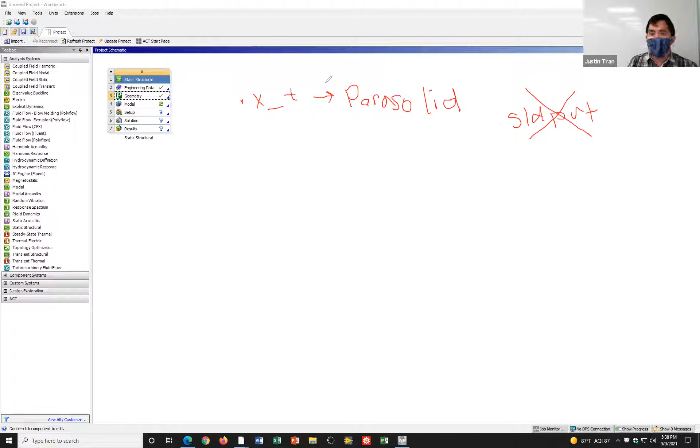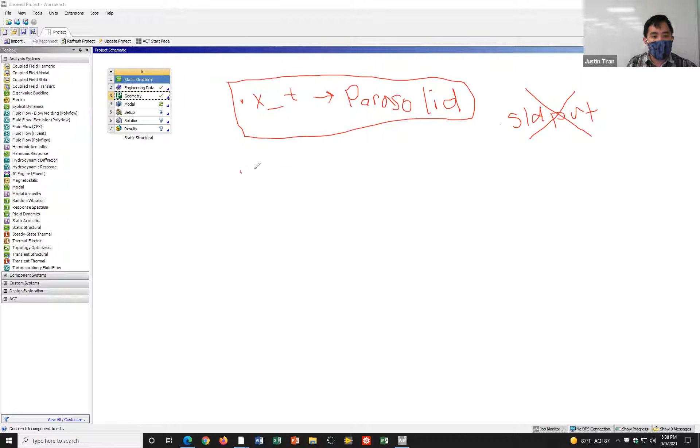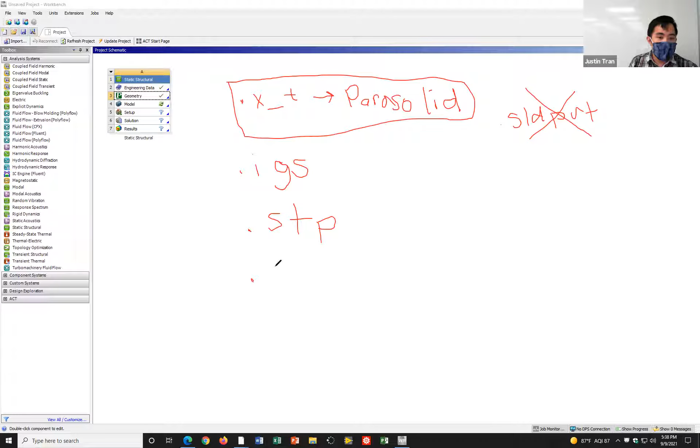You can do that within SolidWorks, you just have to explicitly do it. The x_t format, Parasolid, is a great file format and works really well, maintaining all the geometrical features. Some other ones that work really well that I use often are .igs files, which work really well for importing. STP also works really well, and that's the other file I have on the website, the .stp file. Then the sister or cousin file format for that is .step, and that one also works with Ansys.

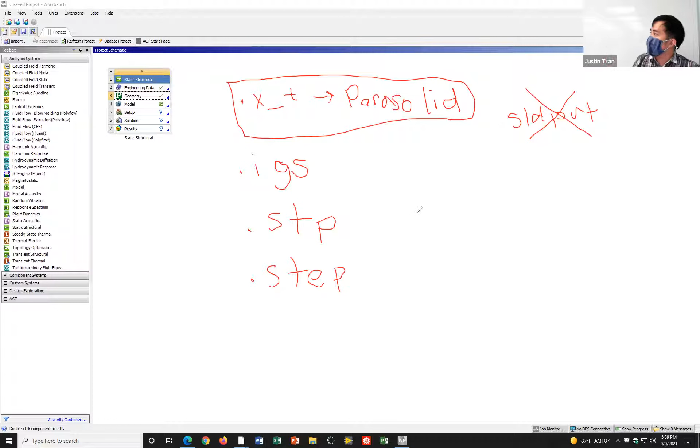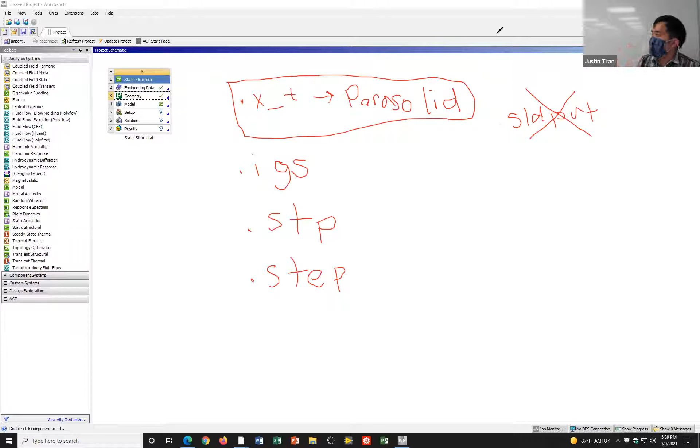All of these file formats are more open source, so both Ansys and SolidWorks can take advantage of them. All of these should work if you're moving a part or assembly from SolidWorks into Ansys. The only thing you have to do is, in SolidWorks, with your part or assembly open, click Save As and pick one of these file types. SolidWorks will convert your file into that type, and then you can upload that into Ansys. Just make sure you convert to one of these types before you import it, because if you try to import the SolidWorks part file directly, Ansys is going to say it doesn't know what this is, and you won't be able to do it.

Good question - is that Parasolid denoted with that P right there? Yes, that P right there is for Parasolid.

So that's imported the geometry, and the fact that you have a green check mark here means it's good to go. You can actually view the geometry - if you right click geometry and click edit in design modeler, you can view it. A lot of times it's good to view your geometry just to make sure everything imported okay, but for this one I've done this activity half a dozen times, so I know it's okay.

Is it just viewing, or do you edit? You can edit it too - you can actually view it and edit it within Ansys. Later on we're going to do an activity on optimization, and we'll use that feature right there, because when you set up optimization, you actually have to set up some stuff within the CAD software to do that, even if you imported it. But we'll cover that later on.

Before we actually launch Ansys Mechanical, the one thing we have to do is create our custom material property. The way we're going to do that is go onto this entry right here called engineering data. Once you double click that, it should bring up this screen right here.

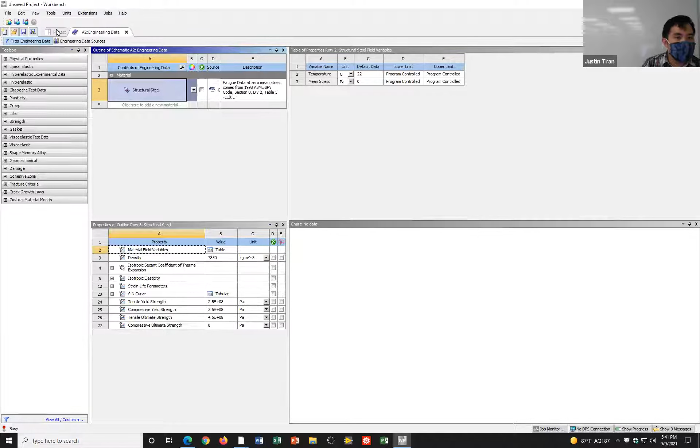Last time I had some people that didn't get the screen exactly like this. If you're not seeing a window exactly like this, you can go to View and click on Reset Workspace, and you should get everything that you see here. We're going to use at least these three on the left and the middle, but not the one on the right - make sure you have at least these three. Okay, everyone still with me? Everyone on Zoom - do you have this material engineering data window?

Okay, silence means yes. Okay, good.

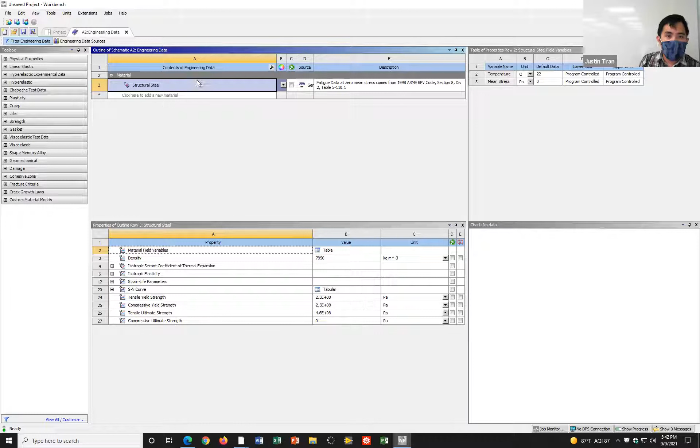Okay, and so you can see right here that the only material that we have loaded right now is called structural steel. This was the material that we used last time in our Ansys activity, and this was the only default that Ansys has. If you want to add a new material, you can either import it from SolidWorks, that's one thing you can do, or you can create the material custom here.

If you look at this entry right here, you can see that it says click here to add a new material. Okay, so let's go ahead and do that. The material that we're going to add is one of the alloys for aluminum. So let's go ahead and type aluminum. The specific one is going to be 6061 T6.

This name is flexible, because you're creating a custom one, you can kind of call it whatever you want. But usually it's better to name your materials after what they actually are instead of like Bob or Jim or things like that. So let's go ahead and hit enter. And then what you see here is that I've created this new material called aluminum 6061 T6.

But you can see here that there's this blue question mark right here. This blue question mark is basically telling us that we've named this new material, but we haven't actually given it any properties yet. In order to actually use it within Ansys, we have to assign things like the Young's modulus and the Poisson's ratio. So let's go ahead and do that.

All right. Now I want you guys to turn your attention to the toolbox on the left. What you'll see in this toolbox are all the different kinds of properties you can give your material. You can see there's a lot, right? You can give it linear elastic properties. You can also give it hyperelastic properties, and there's a lot of options there for hyperelastic.

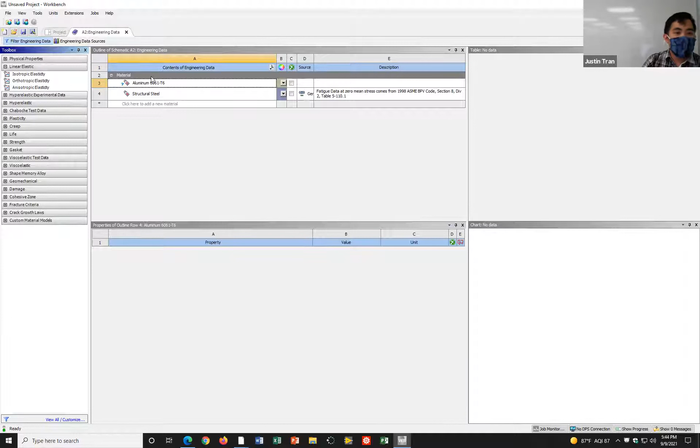So there's a lot that you can do because in Ansys you can do all different kinds of analysis, but at the very least, when you define a new property, you have to be able to define its Young's modulus and Poisson ratio. The way we're going to do that is we're going to assign it as an isotropic material. With aluminum 6061 T6 highlighted, go ahead and double click isotropic elasticity here on the left. Then you'll see the bottom of the screen update here.

Previously we didn't have anything here because we haven't assigned anything for this aluminum material property yet. But now we get a chance to actually assign stuff. If you click on this plus arrow next to isotropic elasticity, you'll see that there's a lot of properties that we can define. In particular, we need to define these two right here: the Young's modulus and also the Poisson's ratio.

And you'll see that the boxes are yellow right there. That's Ansys's way of telling you that, hey, you need to assign this before we can move on. So any questions on this so far?

Okay. Now we need to assign a value for the Young's modulus and the Poisson's ratio. So let's pop back into the PDF. If we look at the top of the document, you can see that our material, aluminum, will have a Young's modulus of 1 × 10⁷ psi and a Poisson's ratio of 0.33. So let's go ahead and assign those properties to our Ansys material. Let's come back to Workbench.

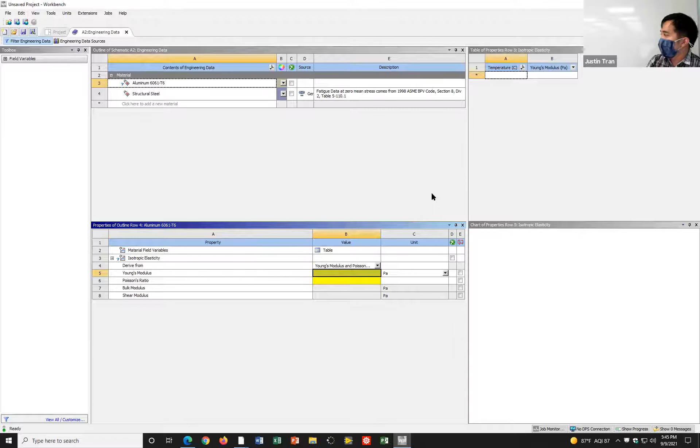Let's start with the Young's modulus. The Young's modulus was 1E7 psi, right? Oops, I don't know why it does that. But what you can see here is that the units for this Young's modulus right now are given in pascals, and so we need to change this.

So let's go ahead and click on this plus arrow down here, and then you can change the units for this Young's modulus to psi. Let's go ahead and do that because those are the units that we're given. With this unit as psi, we can change this to 1E7.

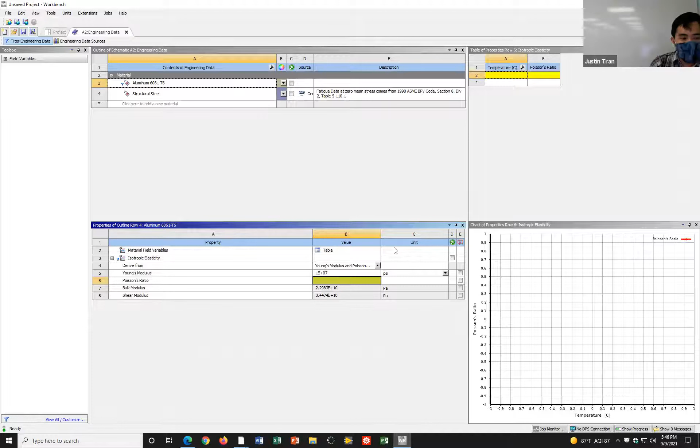Right? And that'll assign a Young's modulus of 1 times 10 to the 7th PSI. Okay. Right, and then let's do the same thing for the Poisson's ratio. And so if we check back on the document, we can see that our Poisson's ratio is 0.33. Okay, and so for the Poisson's ratio, we're just going to manually input 0.33 like that. Okay, and then we're good to go.

And so after we've assigned the Young's modulus and Poisson's ratio, you'll notice that this blue question mark next to the aluminum is gone now, right? And so now that that blue question mark is gone, now we can confidently say that this is a real material. It's like a real boy, right? And so now this material is actually ready to go. We can actually use this in analysis, okay?

So any questions on any of this? Everyone's still keeping up okay? Okay. Yeah, question? Oh, okay.

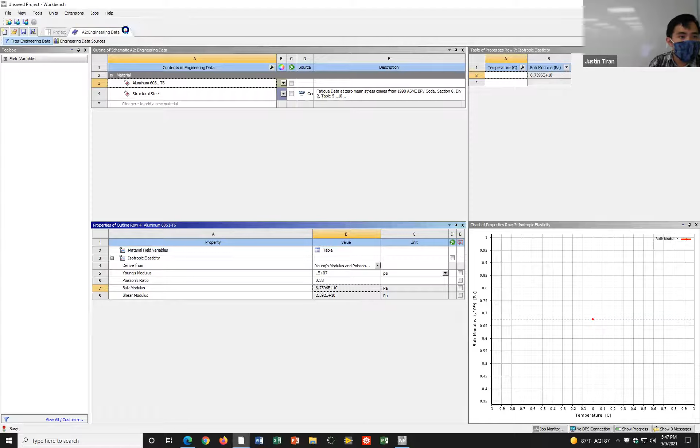Okay, and so now that we're done with this, let's go ahead and close this out. And so if you go to this tab up here on A2 Engineering Data, we can go ahead and close that tab, okay? And then now we're ready to launch Mechanical. And so on row 4 right here with model, let's go ahead and double click that. And if you get a security alert, you can just hit cancel. Okay.

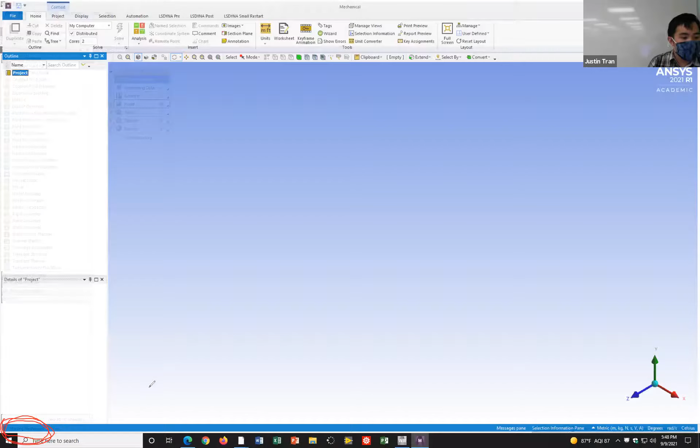Okay. And so it's starting up Mechanical. And so if you're wondering what Ansys is doing, you can check the lower left corner. Okay. All right, if you're opening up Ansys either for the first time or you're here in the lab, you might get this annoying ad. And so if you get that, you can just click on geometry here on the left, and then you can see your part. Okay.

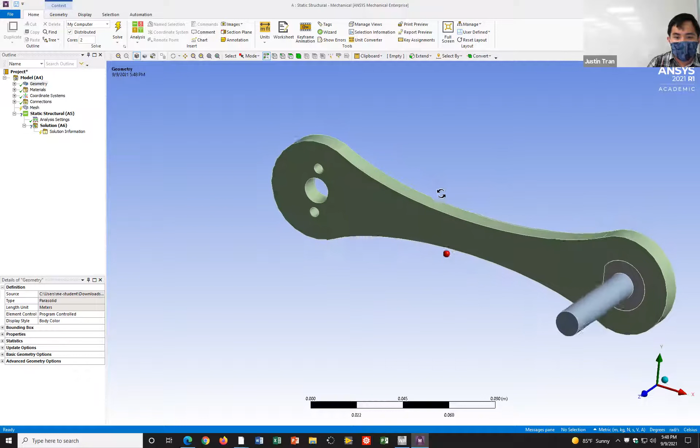All right. And so here we have our bike crank. And so this confirms that our geometry uploaded just fine. Okay. And we're ready to go. Okay. And so before I let you go, because I kind of want to let you guys handle Ansys mostly on your own today, I do want to show you how to suppress parts, okay?

And so part suppression is something that you can do, and I always spell this wrong, suppress. Okay. And so part suppression is something you can do if you want to focus your analysis on just one part of the geometry, okay? And so in our case, the part of the geometry that we're interested in is actually just the crank, okay? But our CAD file here actually came with some extra stuff, right?

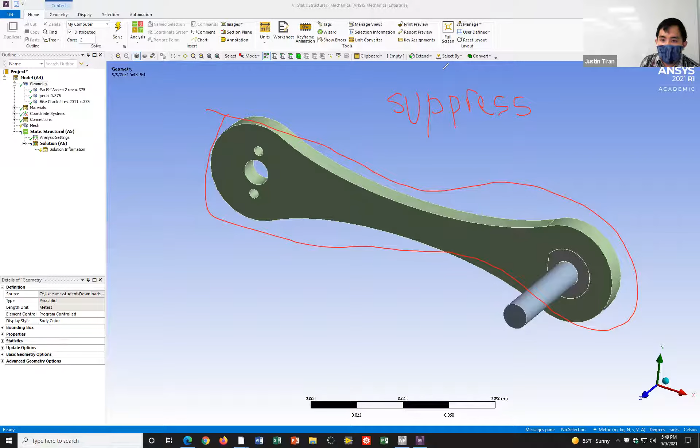And so here we have this rod right here is the pedal. And then we also have this kind of fitting, I don't know if you can kind of see it, that fits the pedal into the crank, okay? And so we don't really care about the pedal or the fitting in here. And so we're gonna suppress it, okay?

All right. And so if you go over to geometry on the left, and if you hit the plus arrow, which expands the list, you can see all the different parts that we have here, okay? And if you click on the different parts, they're going to highlight in the 3D window for you, okay? All right, but in our case, we don't need the pedal. And so what we're going to do is we're going to suppress it.

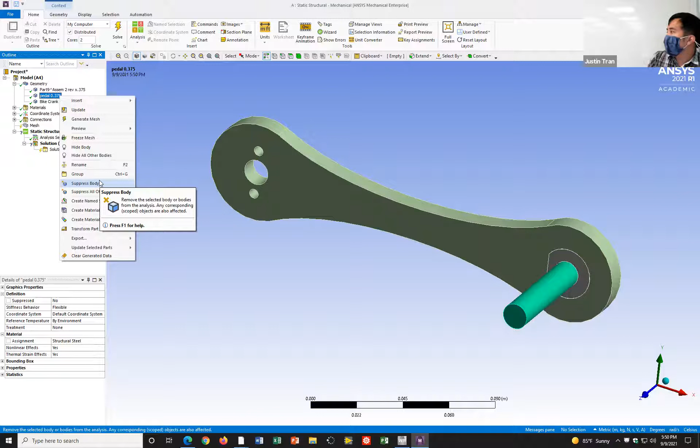And so to suppress a part, you're going to right click the part. And then after right clicking it, you're going to go down to this option right here called suppress body, okay? And so if you read the tooltip for this, it says that it removes the selected body from the analysis. And so we're basically going to say, we don't need you for this, okay? So let's go ahead and click suppress body, okay?

And so that got rid of the pedal. And then we also need to get rid of this fitting right here, okay? So let's go ahead and right click on that and click suppress, okay? And then after that, you should be left with just the crank.

All right. Any questions on this so far? Was everyone able to suppress everything? Good. All right.

Okay, oh, actually, one more thing. Even though we've defined our material property, we haven't yet assigned it to our part. So with this bike crank highlighted, make sure you left click on this. If you come to the bottom left of the screen, the details menu, you should see that this is where we can actually assign the material.

Right now it's assigned to structural steel because that's the default. You can go ahead and change this to aluminum 6061 T6. All right. So now the bike crank is made of aluminum, and you're good to go. From here, you can start on page 5 of the PDF. On page 5 you should see instructions on meshing, boundary conditions, loads and constraints, and the analysis.

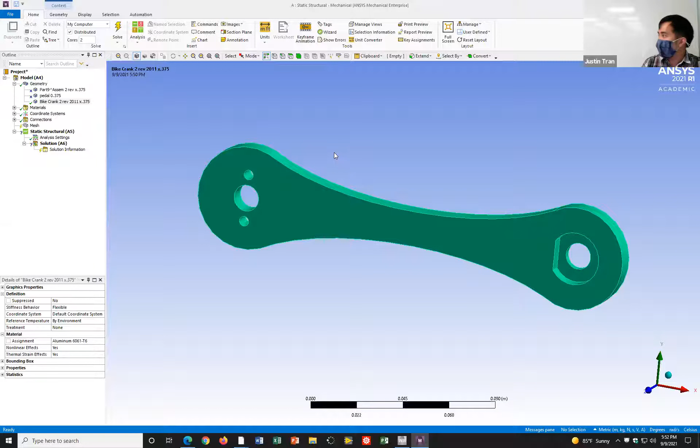From here, I'm mostly going to let you guys handle this on your own. But I will be going around the classroom, and coming back to Zoom to help people individually. The only thing I'm going to tell you is that for the mesh, I want you to include at least one method object, okay?

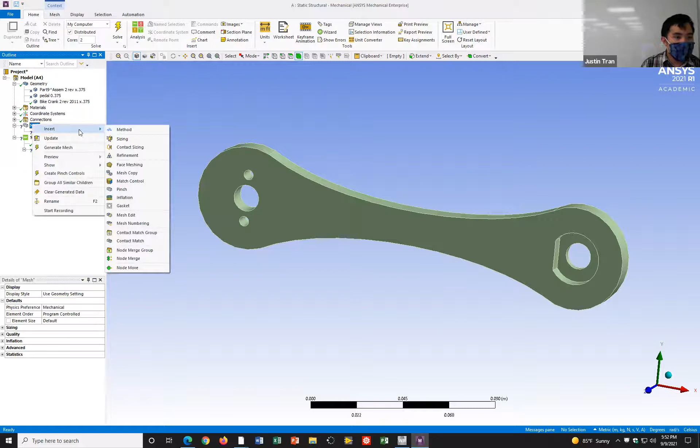That's it. This is what it says in the PDF too. I want you to assign a method to this, and I also want you to assign a sizing. This is what you're going to use to change the size of the mesh. In terms of loads and constraints, you need at least one fixed support. Based on this physical situation, I'll let you choose where the best place for the fixed support is going to be.

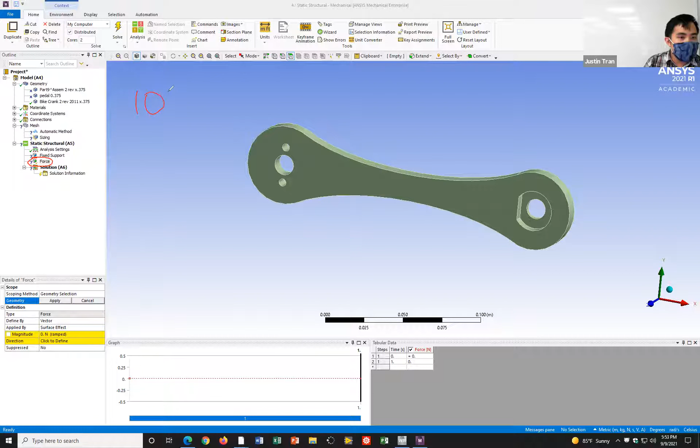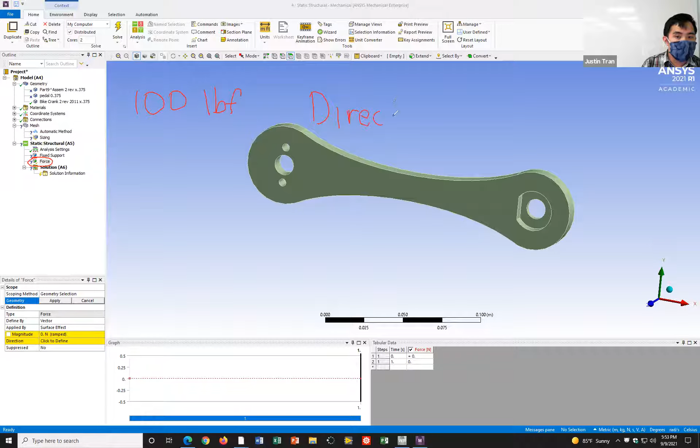I also want you to include a force. In the PDF, the amount of force I want you to apply is 100 pounds, so it's a 100-pound force. But I want you to decide which direction for the force makes the most sense. Think about which direction is going to cause the greatest amount of stress within the bike.

Because ultimately the point of this finite element analysis is to determine if this bike crank is going to fail under these loadings. In those situations, you want to simulate the worst possible loading situation so you can see if your structure is going to survive that worst case.

You can apply the force in this direction, this direction, or this direction, and you can even do it into and out of the page. Think about what's most realistic for a bike crank, for someone pushing down on it with their foot. Among those realistic conditions, which one is going to cause the most stress?

For your results, the only ones you really need are total deformation and equivalent stress. This is the starting point. Throughout today's activity, I want you to fill in all the settings for the automatic method, the sizing, the fixed support, and the force. If you do all those correctly, you should be able to get the results.

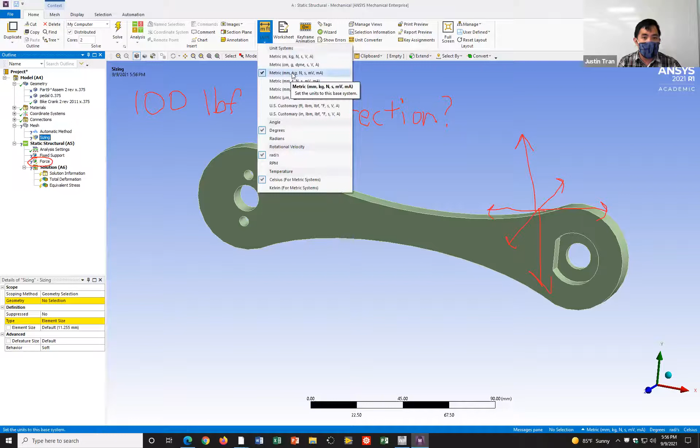But then when they got to the force, then obviously they need something in pound force. And so they switched it down here. And so the nice thing is that whenever you switch units within Ansys, it'll automatically convert everything before that. And so you can kind of switch around the units based on what's convenient for you at the time. I think the worry that people were having is that if they switch units here, is that going to mess up stuff over here? But it's not. Whenever you switch units, it's going to automatically convert stuff.

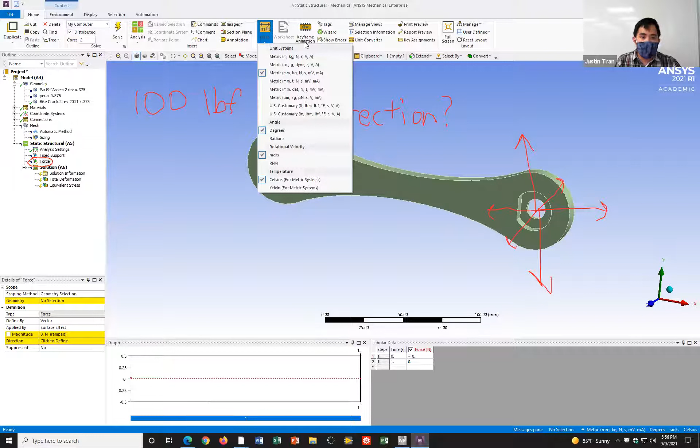Feel free to work together too. So you don't have to work in silence.

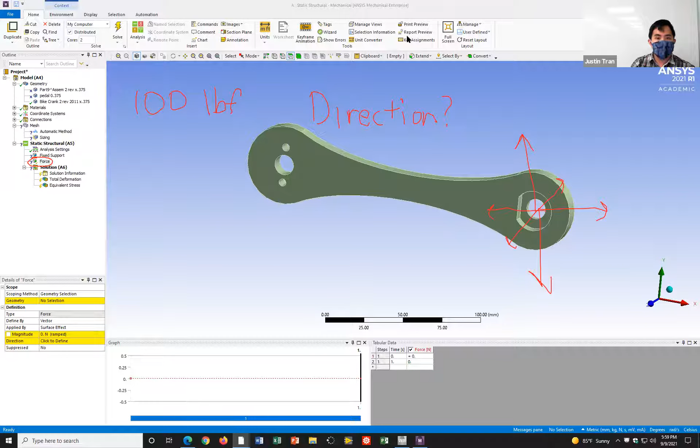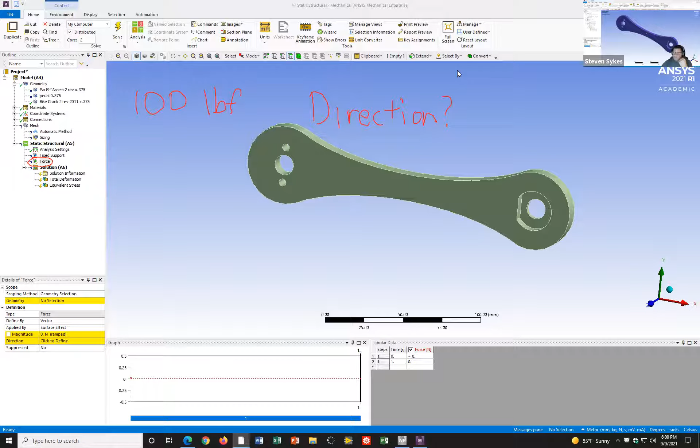Dr. Tran, when we're selecting the mesh using the method that we added, it says to select hexahedrons, but the element order that I'm selecting does not give me hexahedron. Yep. So the hexahedrons is going to be from this method right here. Right now it's grayed out because you need to select a body. So if you select this entire body like that, you hit apply. I see. And then now you can change it. Gotcha. Oh, I see. So it does only say tetrahedron.

When you mean quadratic order, are you referring to all quad for the mesh type? No, so the quadratic order is this one right here, the element order. Oh, okay. Yeah, and right now this is the global setting, and so I want you to change this to quadratic. Right here. Then just leave the mesh type to be quad and tri. That one's fine. Oh, I get it. You select the quadratic, then the hex dominant shows up, allowing you to select that one. Yes. Okay. Cool.

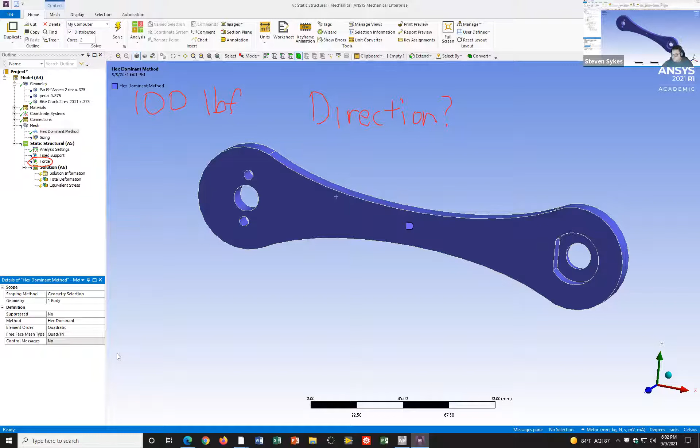This error message is saying that geometry selection is required. So right now your boundary conditions aren't set yet, and so you need to set the boundary. Oh, I thought I could just run the mesh just to see if it works with the hex. If you wanted to check the mesh, you can right click the mesh. Right there is fine. So just generate. There we go.

Cool. So that seems like it likes the tetrahedron, or the hexa. Yeah, that was good. So the hexahedron refers to kind of the shape of these blocks. You can see what it looks like. So that's what a hexahedron is. Cool. Excellent. Thank you very much.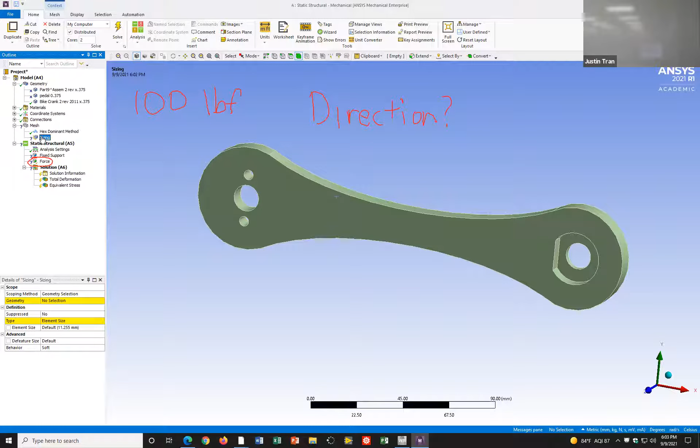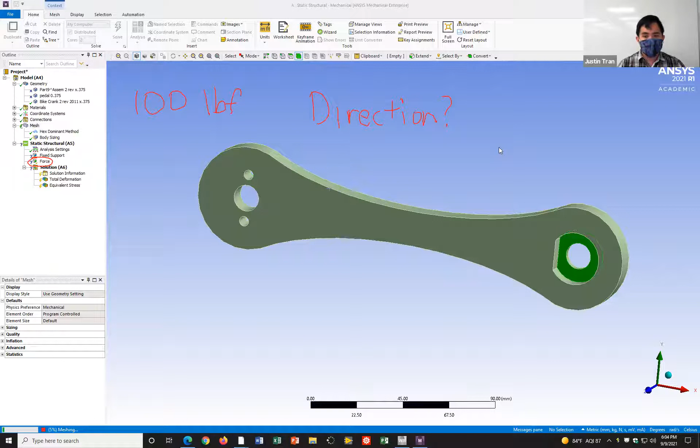I'm trying to. What was the error that you got, David? Accidentally clicked out of the error page. Oh wait, it just says the mesh failed to generate. Try making your elements a bit smaller.

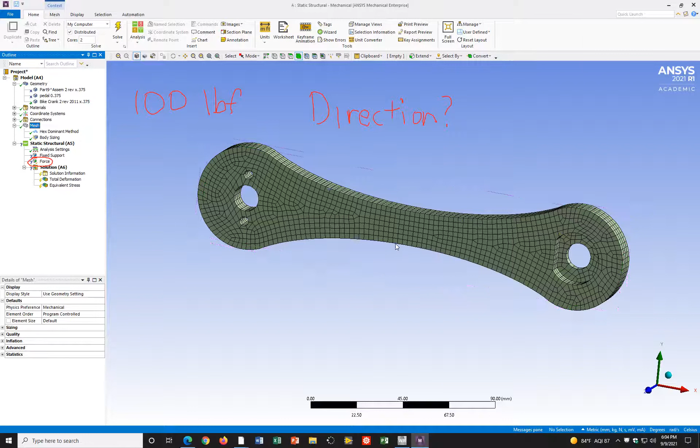So the thing with hexahedron meshes is that they're a little bit hard; it doesn't always work for every geometry. And so kind of the solution for that is just to make the elements a little bit smaller. So go to your sizing object and try to make it a little bit smaller than it was before. All right, I'll try it out.

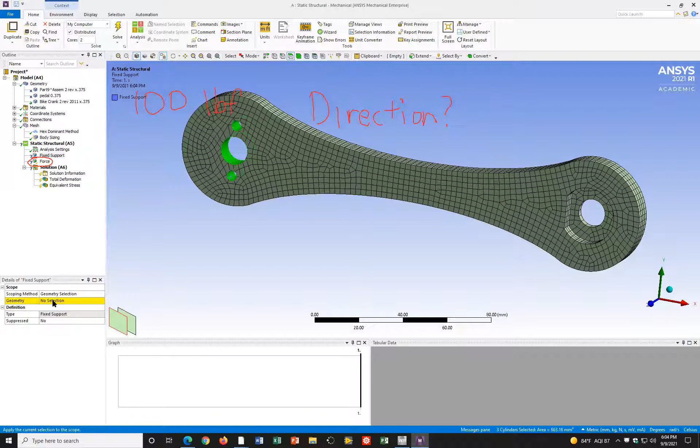Question. For the refinement, since we're working with 3D, would we be choosing like the inner part of the shape? Yeah, it's a good question. So in refinement, when we did that for the 2D case, we chose an edge basically. For 3D, you can actually do both. You can do an edge, or you can choose a surface. Surface will be a little bit more stable because then it has a bigger surface area for it to refine around. But you can do an edge too, and it should work.

And if we were to do the edge, we would have to choose both sides? You can choose multiple surfaces too. If you hold control on your keyboard, you can click multiple things. But technically you don't have to, so you can just refine around one edge, and that's technically okay. But if you want to select multiple ones, you can hold control and then click multiple surfaces.

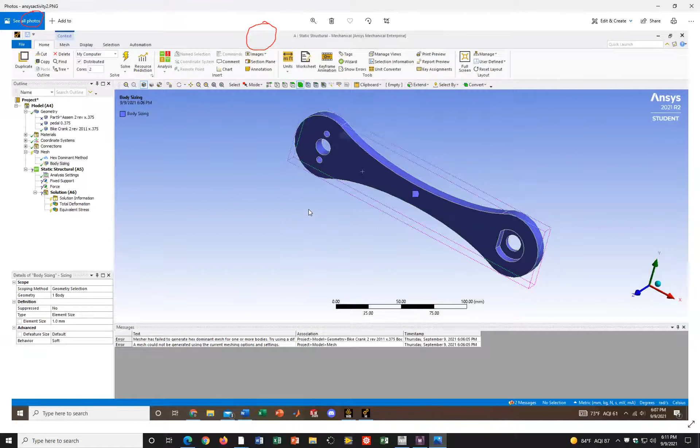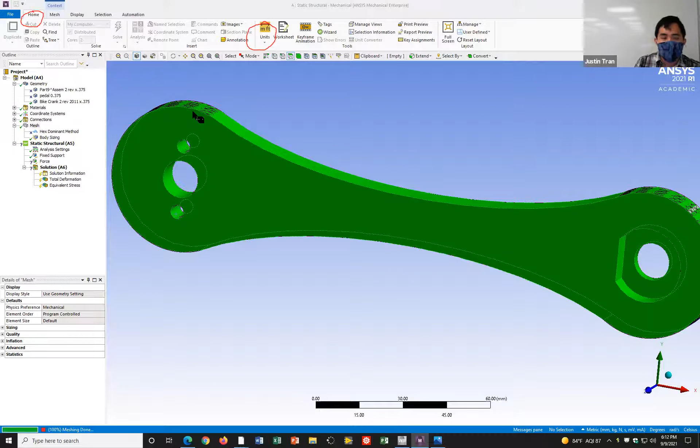David, can you try just suppressing this one for now? If you go to your hex dominant mesh, just click suppress, and then see if you can create the mesh like that. If I remember from last year, a couple people had some issues with the hex dominant mesh too, and no matter what they did, it wouldn't work. So it might be a computer specific thing. Yeah.

I think I may have the same problem. It's not generating the hex. Well, at first... go ahead. Yeah, go back to your sizing. Right now your sizing is 5 millimeters, so you're saying each element is 5 millimeters big, and you want to make that smaller. So go ahead and change it to 4 millimeters. Try lowering it. You have to uncheck it. You see the little view there. Now you can.

Same issue with the hex. Originally I did the refinement, then generated the image, and it just became that. The refinement update is still staying the same. You might have to just regenerate the mesh, so right click on the mesh.

Unfortunately the refinement only works with tetrahedrons, it doesn't work with the hexes. For this activity it doesn't matter all too much, you're going to get probably the same thing, but it's good to know.

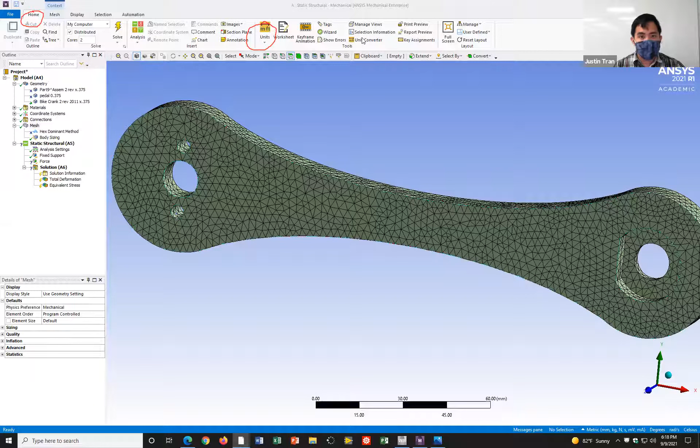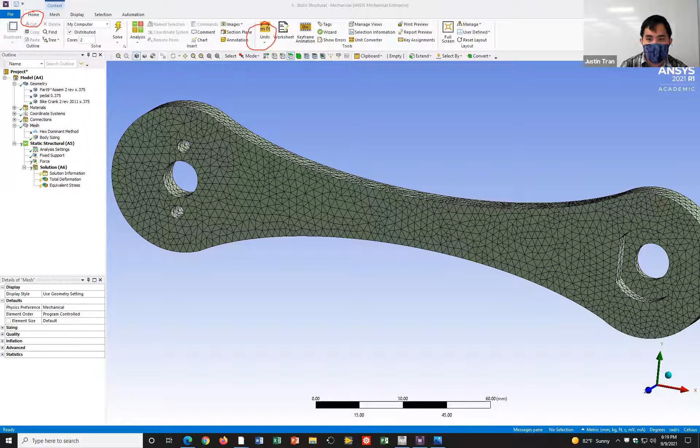Let me just message you. Okay, yeah, try making it smaller, but you can also try suppressing that one too.

All right Jasmine, you had a question right? Yeah, actually I had a question.

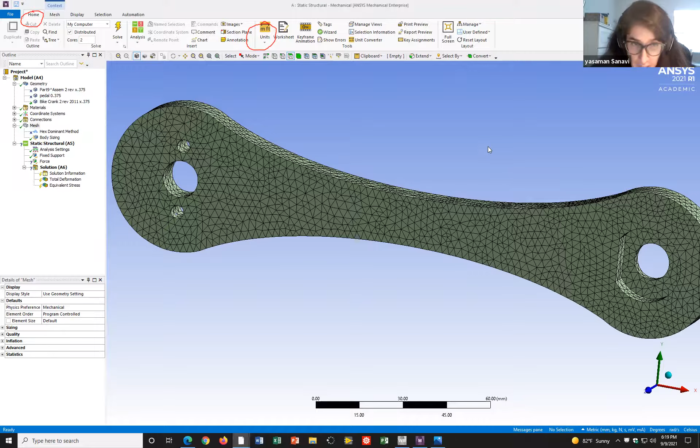I was wondering, in Ansys is there any way we can measure the thickness of the bike crank? Because I accidentally put 0.2 inch for the mesh size, and I think I'm getting exactly 2 cubes on the thickness of the bike crank, so I thought maybe the thickness is 0.4, but I don't know if there's any tool to measure it. No, that's a good question.

It's definitely useful because a lot of times you want to choose the mesh to be kind of the same as your thickness.

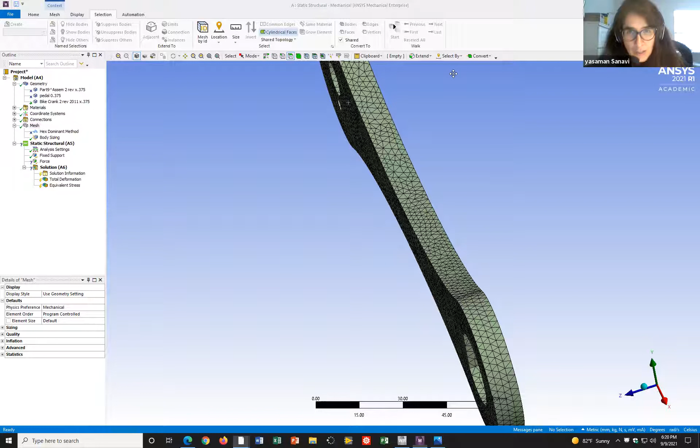I know in Design Modeler there's a way that you can measure stuff, but I don't know where it is. I opened Design Modeler just to check. I guess it might be possible, but I'm not sure exactly where. Oh, actually, if you open the part within the other CAD software, which is SpaceClaim, there's a measuring tool in there that's pretty intuitive to use. I know that one because we're going to use it for a future activity, but for Design Modeler, I'm not sure where the measuring tool is exactly.

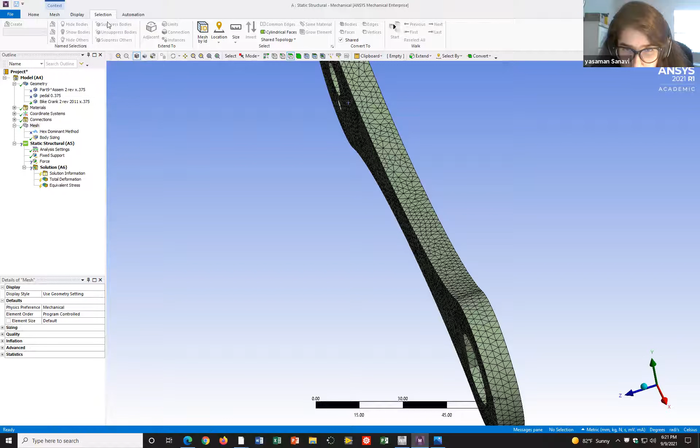It's actually deactivated SpaceClaim for me, I don't know why, it just won't click on it. You might have to close Design Modeler in order to use it. Oh I see, okay, yeah, because I don't think you can have both open — in theory if you use one to modify the geometry it's going to affect the other, so it probably just prevents you from opening both. Yes, that actually makes sense, thank you.

All right, how's everyone doing? Was everyone able to get to some simulation results, see the information? Cool, cool.

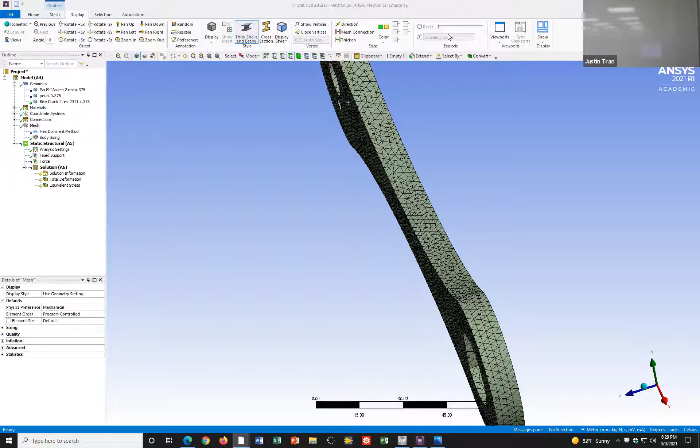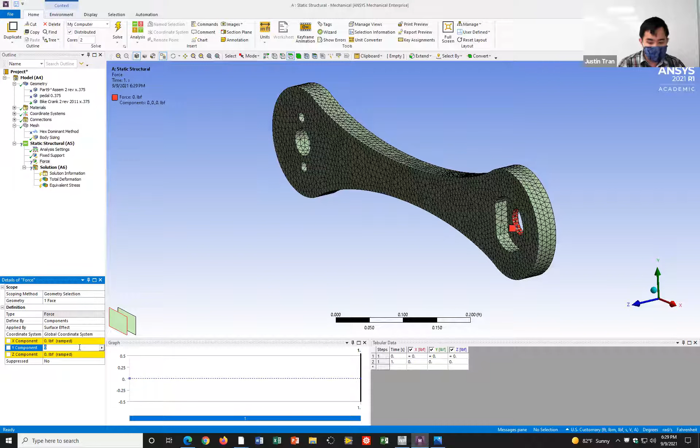Okay, so I do want to bring it back for just a second. No matter where you guys are in the activity, let me go ahead and summarize where I want you to take this, okay? Actually, let me finish this up myself so you guys can see. Select this one here. Force. So let me go ahead and run this. Okay.

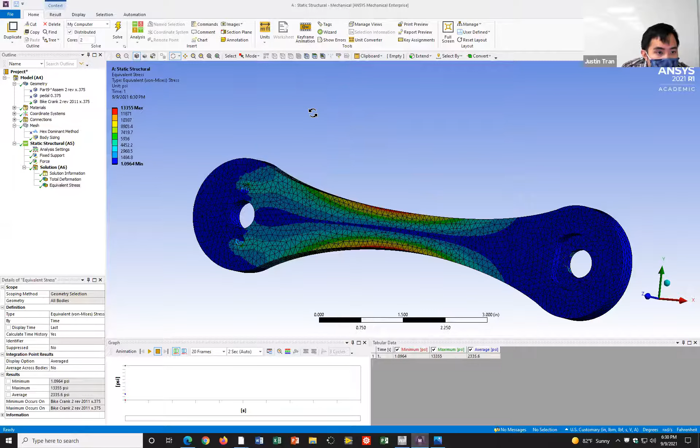And so when you run the simulation, you should get something like this for the stress field. And actually, let me change this to PSI. Okay. And so you should get an equivalent stress field where you get a stress concentration over here, okay? And so this is kind of what you should expect.

And so the question is, what do I want you to do with these results? If you go back to the PDF and you go down to problem 5, you'll see that I'm asking you to find the maximum load that this bike crank can handle. Because right now we're applying a load of 100 pounds this way, and that's producing a stress field that has a maximum equivalent stress of about 13,355. A question in the chat?

I'm using tetrahedrons for now. If you have it in hexes, that's great. But for this one, tets should be okay. The only thing is you need to make sure that you have quadratic elements. That's the most important thing.

Okay. And so if we go back to the PDF, what I tell you here is that the aluminum that you're using to make this bike crank has a yield strength of 35,000 psi. If you remember from a couple lectures ago, the yield strength basically means that if the equivalent stress ever exceeds the yield strength, then that bike crank is gonna break. And so what I want you to do is increase the load until you get a maximum stress of 35,000.

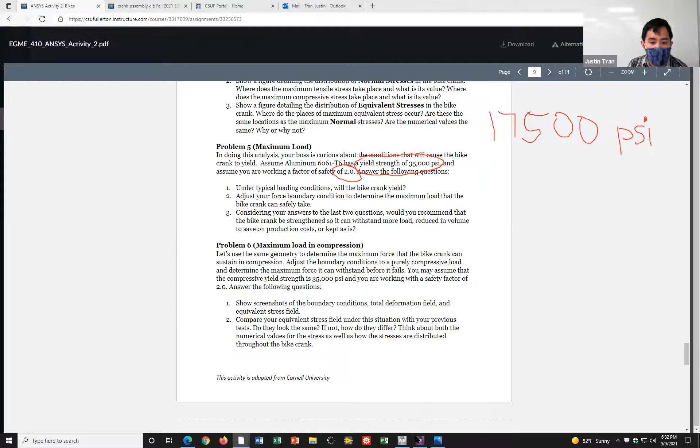And so if we go back to Mechanical, and I go to this force, right now you can see that the force I'm applying is 100 pounds. If I increase this to, let's say, 120 pounds, I rerun the simulation. I increased the force to 120 from 100. You can see now that the maximum stress has increased. Before it was about 13,300, now it's about 16,000. So we're creeping a little bit closer to 17,000.

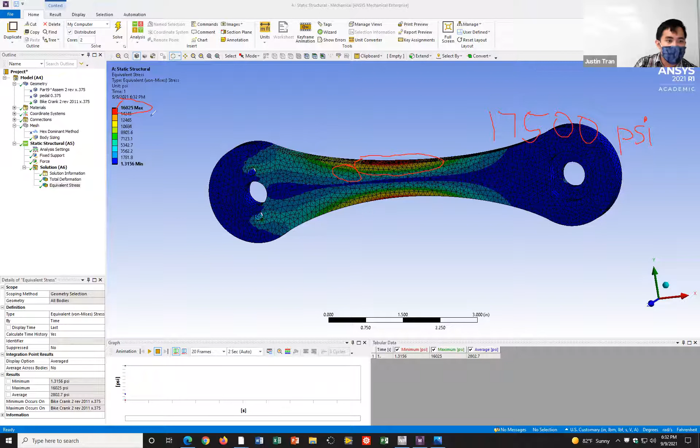To get even closer, I can increase the force even more. Actually, no, I won't, because I know what the answer is, and I don't want to get too close to the answer. But basically, once you have everything set up, you can keep modifying this force until you get a maximum equivalent stress of 17,500. And once you find that force that produces this stress, that's going to be the answer to that problem.

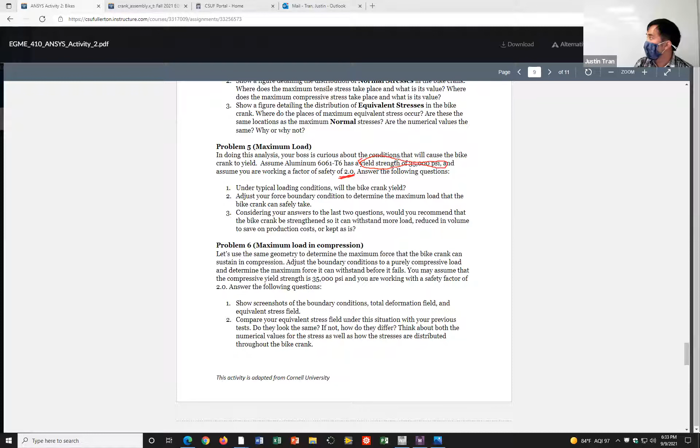How do we come up with the number 17,500? Yeah, so the 17,500 comes from the fact that for the aluminum material you're using, the yield strength is 35,000. Once the stress reaches 35,000, the aluminum bike crank is going to fail. But I want you to work with a safety factor of 2, so we're cutting that stress in half, so that we have a little bit of margin to play with. Does that make sense to everyone? Any questions on that?

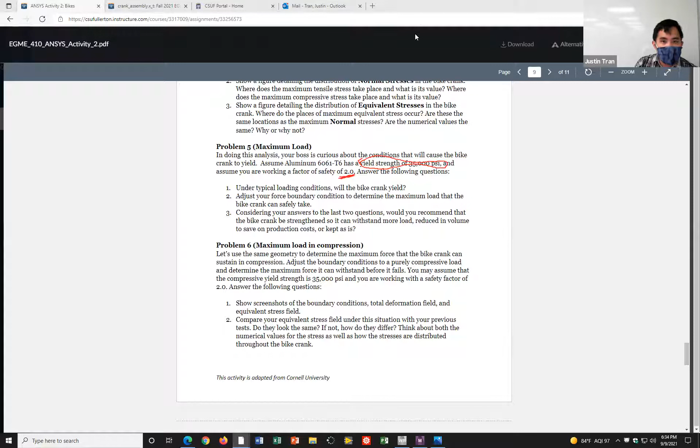Okay. All right, and so that's problem 5. For problem 5, you're applying the force here in the y direction. But in problem 6, I want you to find the maximum load that it can sustain in compression. So I want you to change the direction of this force. Instead of the negative y direction, we apply it in the negative x direction. If I change this x component to negative 100, now the force is compressing the bike crank this way.

And so if I run the simulation with the compressive force, you can see that the stress is much lower here, because we're no longer in bending. In fact, the stress we're getting is around 1230. So looking at that, you can actually increase this force quite a bit. Let me increase this to 1,000. This one I don't know the answer to yet, because I haven't done this part, but I do know that in compression it can sustain a lot higher forces than in bending.

Okay, right, and so you can see I've increased the force from 100 to 1,000. And you can see now that the maximum stress is much higher, and so we're a lot closer here. So let me do one more. And so let's try 1,500. Okay.

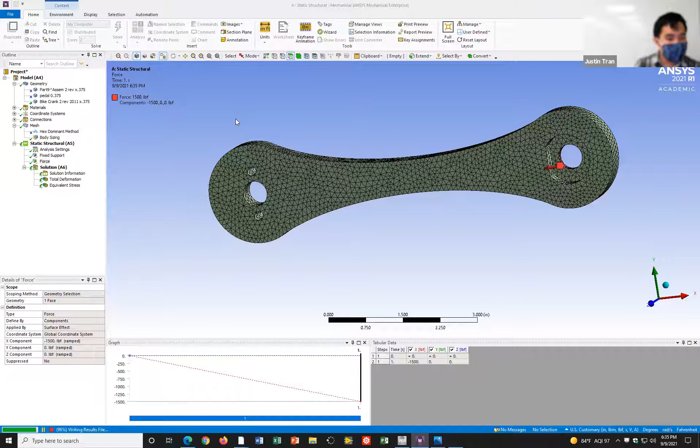Okay. All right, and so with the force of 1,500, then we went over a little bit, okay? And so the maximum force that it can sustain in compression is somewhere between 1,000 and 1,500, okay? And so I'll let you guys kind of play with that and try to find the exact number. Okay? And so that's problem 6, okay?

And so there's a second problem 6 because I'm bad at numbering and I'm kind of an idiot. But in this problem here, what I want you to do is I want you to take the results of what you found in problem 5 and problem 6, and I want you to put it in a way that you would basically communicate with your manager for it.

Okay. Because a lot of times, when you're working as a finite element engineer, your manager or even your coworkers are not going to want to look at pretty screenshots of your work. And so what they want is basically just the main points of your analysis. Okay. And so in problem 6, basically what I want to do is, imagine you're writing an email, you're writing a report to your advisor or to your manager to basically tell them what you found from your finite element analysis.

Okay. And so, the point of this is to get you guys in the habit of, how do I express my finite element results in writing, to give you a little bit of practice, because we do have 2 projects in this class. So we have a midterm project and a final project. And so this is your chance to get a little bit of practice of, how do I take these finite element results, which are normally figures, and then communicate them in a way that's parsable to someone who may not be an expert in finite elements.

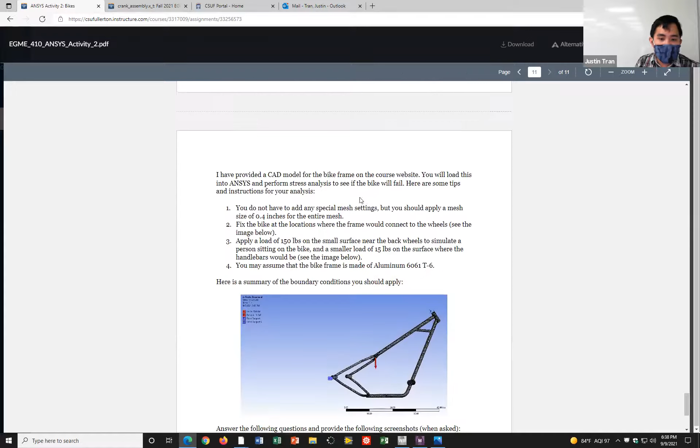Okay. All right. And then problem 7. And so the very last one, I want you to do a separate finite element analysis on this bike frame. Okay. But I thought about it before the lecture today, and I'm making all my grad students do this because they're a little bit more advanced. But for you guys, since this is the undergraduate version of finite elements, and I'm already asking you guys to do a lot already, I will make the very last one optional.

Okay. And so if you do it, I'll give you a little bit of extra credit for it. I'll give you a 10% bonus on the points for this one if you want to do that one. But you don't need it to get full credit. Okay. And so I'll send an email to confirm that, because I know that there's a lot already, and I want you guys to make sure that you get everything else done first before you tackle something like that. Okay. But if you do want to do it, then there's instructions for you here in order to do this analysis on this bike. Okay.

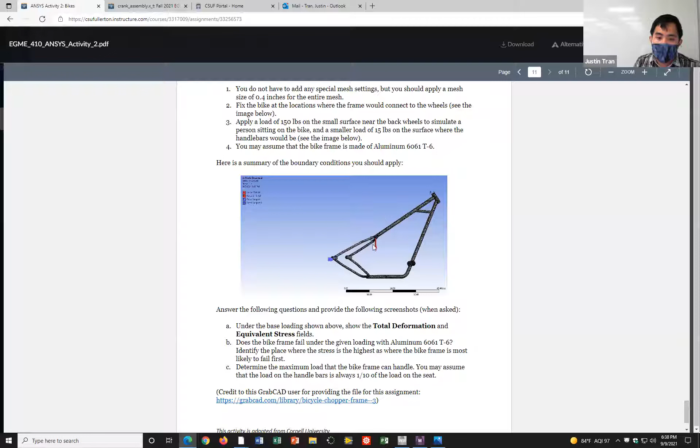All right. So any questions on any of this? Okay. All right, so that's all I had planned for today. And so I know we still have a little bit of time left. And so, if you guys still want to keep working on it, I'll stick around for the next 20, 30 minutes just to help people out. But if you want to work on the rest of it on your own time, that's fine too.

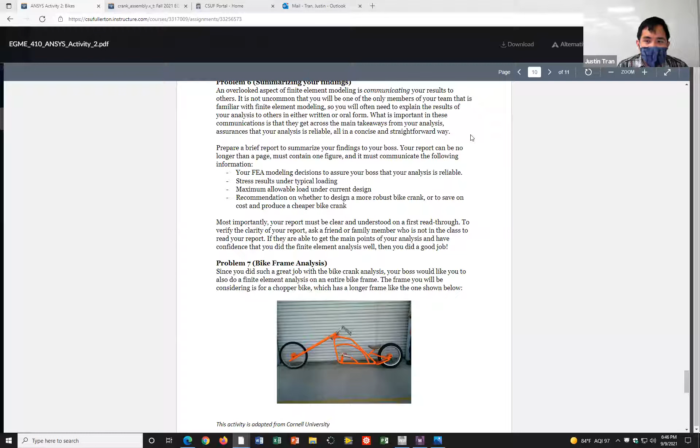There's no right or wrong answer for the positioning of meshes in static structural? What do you mean by positioning of meshes? Like selecting the refinement. Well, for the meshing, I selected this on my screen. Oh, let me look at your screen.

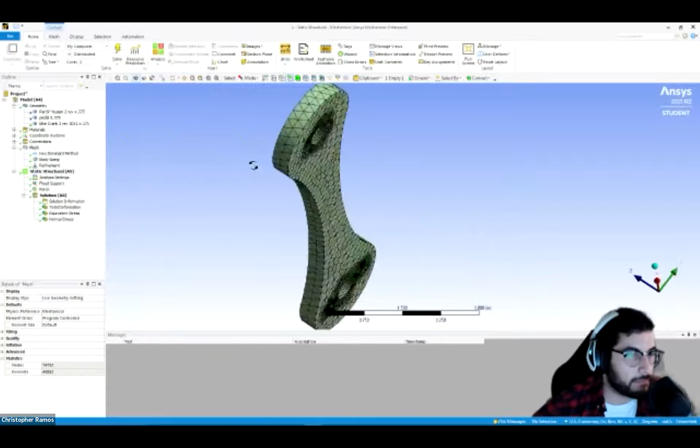Yeah, I selected this for my mesh, the front and back. And I just wanted to see if there's really no right or wrong answer for selecting the type of mesh. It's just based on my own analysis.

Yeah. So generally, where you want to add refinement is, and I've been telling people in the class this, that when you add refinement, you generally want to add it on areas where there's stress concentration. So if you have a stress concentrator somewhere, that's usually a good idea where you want to add some refinement. You can use that as your guide. But it's not a right or wrong thing. It's more your judgment as the finite element engineer about where you need refinement or not.

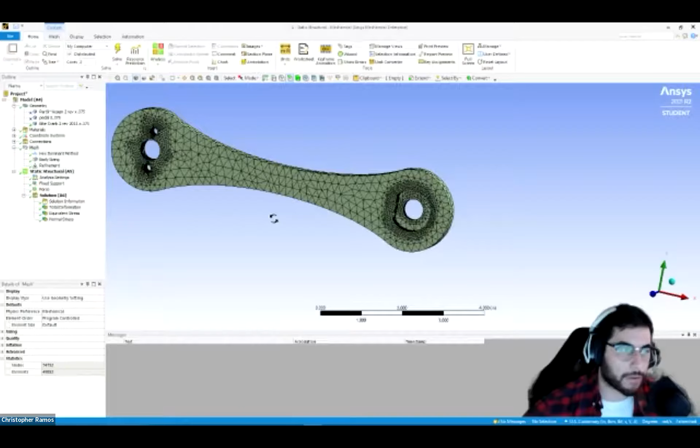Okay. And one more question. The force, is it being applied to the location that we deemed it to be? Yep. All right, because I noticed that you simply selected this interior side, and originally I selected this and the interior as well, because that's where the pedal and the part were residing. So I figured that's where most of the load's being applied.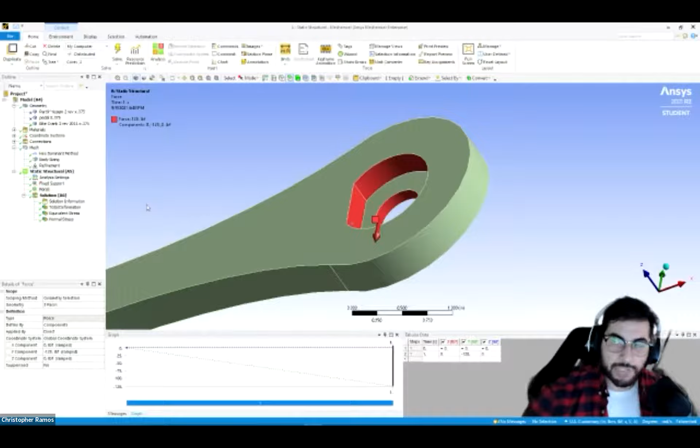Yeah, I think yours makes a little bit more sense because the pedal is going to be compressing on both of those things. I just picked one to make it fast. But yeah, I think it makes more sense to distribute it across all of the surfaces. But for this activity, if you do either one, you're going to get very similar answers. But speaking purely physically, I think yours makes a lot more sense. All right, cool. Thank you very much.

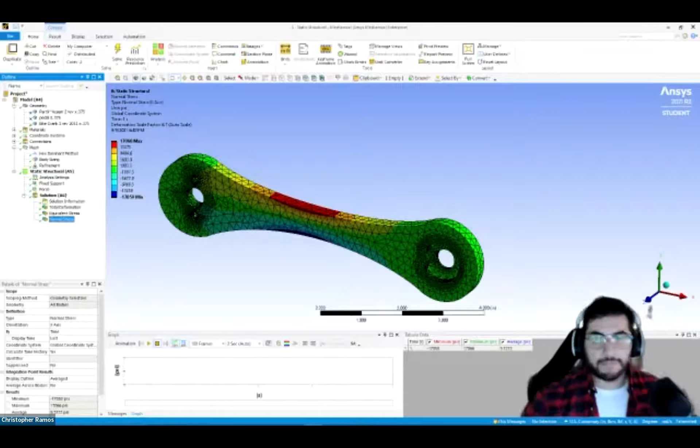Professor, how close to 17,500 would you like us to be? Spot on? It's going to be really hard to get really spot on. So if you get within, I would say, 2% of it, then you're good. Get the first 3 sig figs, let's say that. So if you get 17,500 something or 17,400 something, I'd say that's good enough.

Oh. I have an issue with my display. You know how to fix this? Oh, it's like that. Other people have had issues with that too. I've never been able to recreate it though, so I'm not really sure what to say. I remember one person had that issue last year, and our IT person said to check your resolution. But she never followed up, so I don't know if it actually fixed it. What I've been trying to do is go here, properties. I've been playing around with that compatibility. I saw on some forums you have to mess around with it.

It really depends on the computer. I see. I probably have to mess with it. Okay. Yeah. Play with the resolution. Play with the compatibility. Let me know what you find too, because I've never been able to recreate that myself. Yeah, because when I get home, I connect it to a Mac. That kind of blows up my screen, so I have to mess with a few things. But that's the one I'm still trying to figure out. I see. Let me know what you find, because I know at least one other person's having that issue. Cool. Thank you.